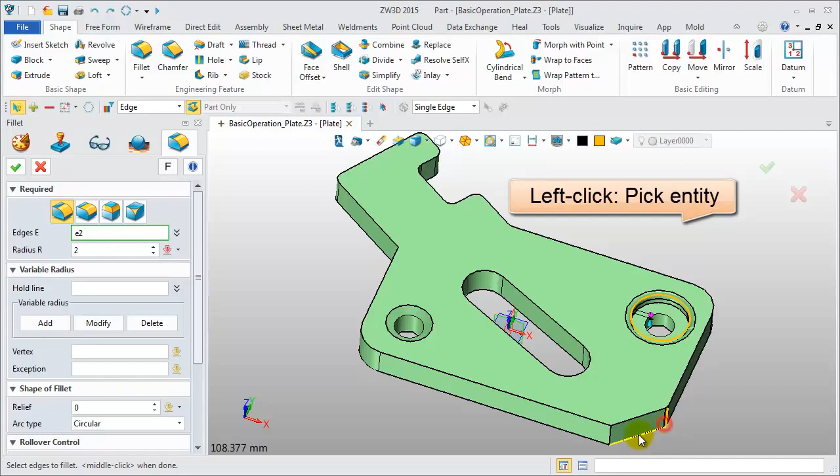Left-click on the object to pick an entity. Hold the Control key and left-click to unpick the entity. In the input box, you can roll the wheel to change the input value.

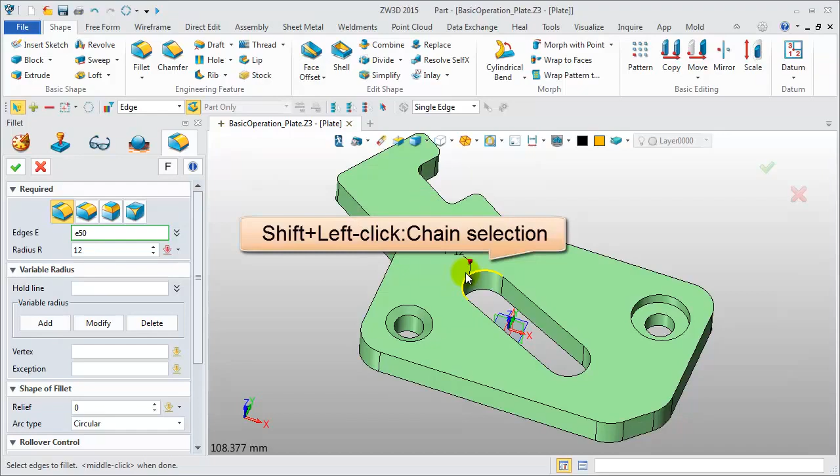Do the same operation. You can middle-click to repeat the last operation. Press the Shift key and left-click to do chain selection. Middle-click to accept the input and finish the operation.

Hold the Shift key and roll the wheel. This way we can quickly select the filter object.

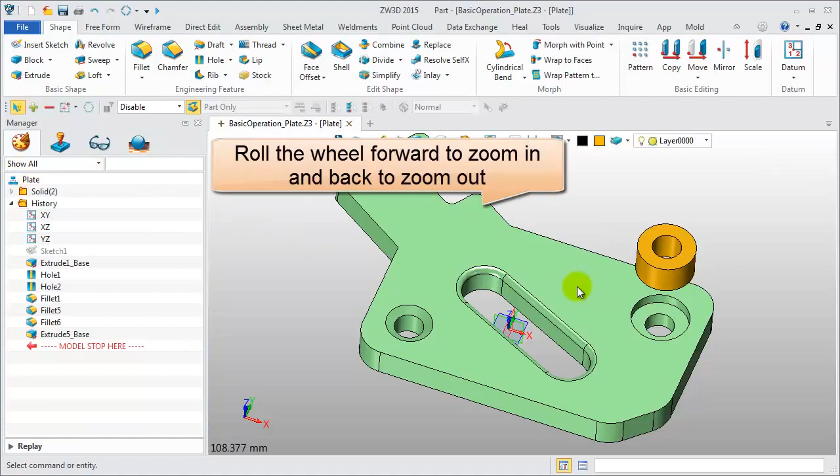Roll the wheel forward to zoom in, and backward to zoom out. Another way is to press and hold the Control key and middle button to zoom. To pan the model, just press and hold the middle mouse button.

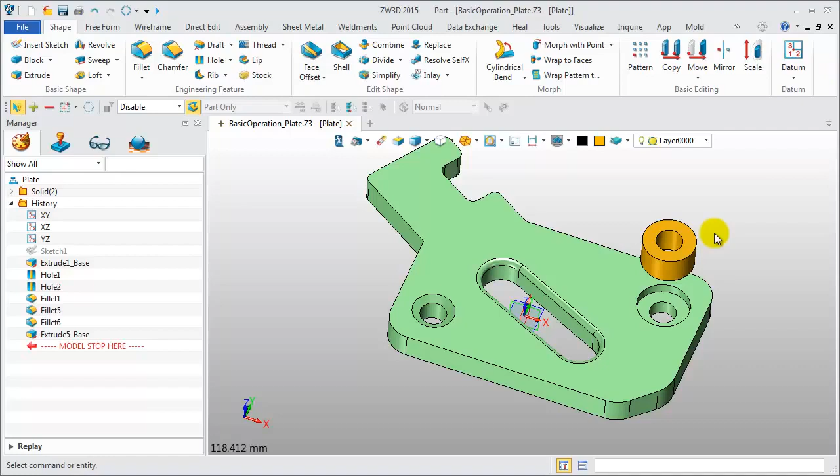Now, change the filter setting. Right-click the object and you can get a right menu. Middle-click to accept the input and perform the command.

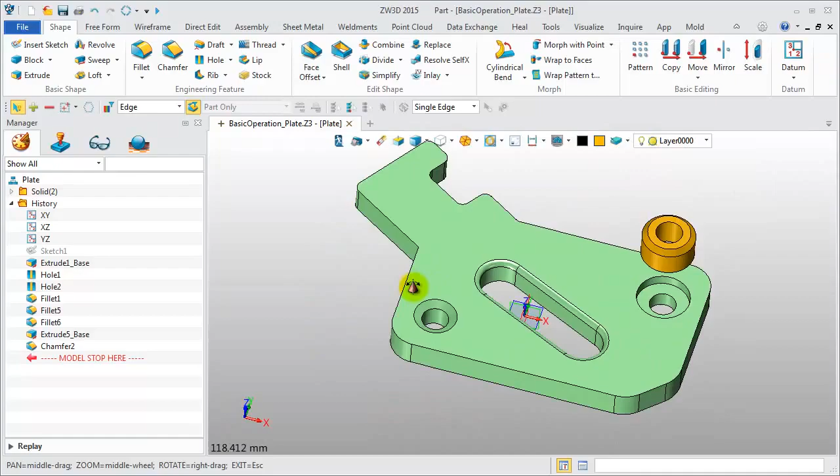Press and hold the F3 key and right button to activate dynamic rotate with the Z-axis. Pressing and holding the right button, you can rotate the model with any point.